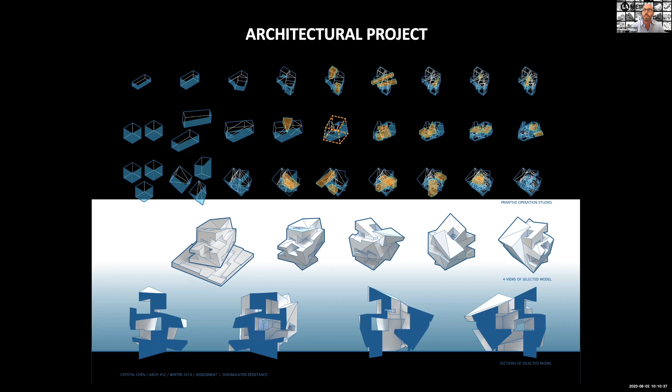To give them some formal ideas or formal interests that have sectional qualities and spatial qualities, usually surrounding geometries that then get embedded in a site. So it's a setup to give them, I guess, an inspiration and architectural interest that they can work on the whole 2 quarters. Our program this year is a multi-income housing and hotel project. It has a bunch of social and health services as well embedded in it, creative office spaces, and retail. So it's quite a large project.

It has a lot of public exterior and interior spaces. We generally fill about 50% of the block, and I'll explain that as well.

We've been reading a little bit about spaces in between. The general program, the housing is about 250,000 square feet, which I know is quite large.

Micro unit housing, about 25,000. Transient hotels, about 20,000. Boutique hotel, 30,000. As I said, it's a multi-income, multi-social type environment. There's high to mid-income housing, mid to low-income housing, and transitional family housing as well. Family services are also built into the project.

There's a large commercial and public space, about 400,000 plus square feet. There's public restaurants, cafes, cafeterias, retails, and flexible creative office space as well. Exhibition gallery spaces and a lot of public land space, about 50,000. So overall, there's about 660,000 square feet.

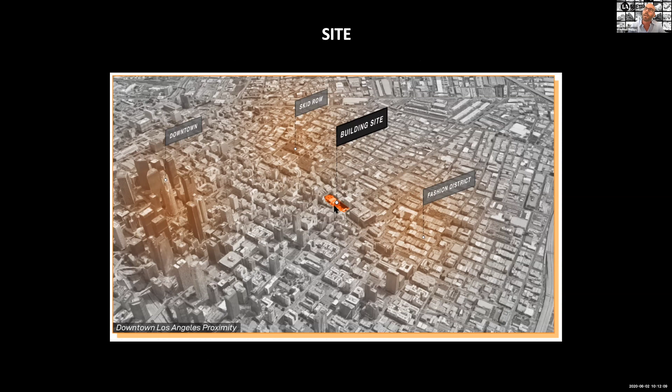Our lot here in Los Angeles - here's downtown, here's the fashion district, here's Skid Row. We're on this interesting moment on Main Street where the grid comes together, on this block between 8th and 9th Street. It's a fairly empty lot, mostly a parking lot.

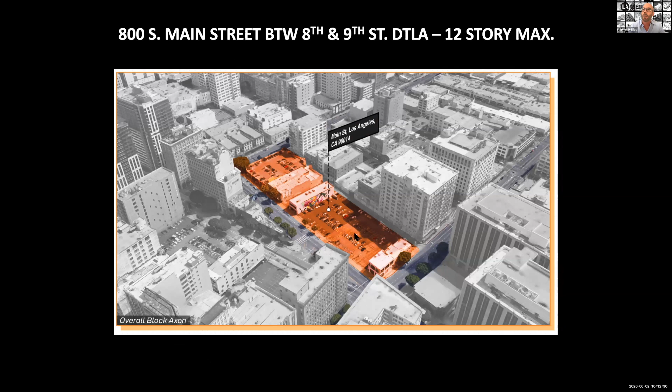We've taken the entire lot, which is basically about 625 feet by 175 feet, so it's a 110,000 square foot print. We're allowed to go 12 stories high, so they're going to end up with a 660,000 square foot building.

So you're generally looking at about a 50% porosity that's guaranteed in the system. There's going to be a lot of open spaces, and we're starting to think about it urbanistically.

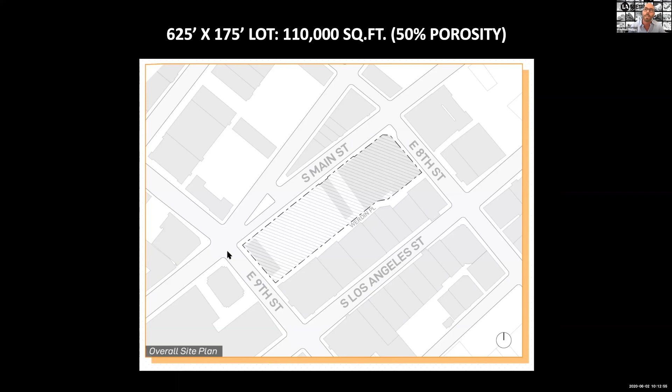Generally we break down into three clear strategies, looking at spaces in between. There's an architectural concept, form and material. There'll be an urban concept. They'll have a clear site strategy. And then an organizational programmatic concept that comes up mostly in section and plan, which can become socio-political as they choose based on where they put things.

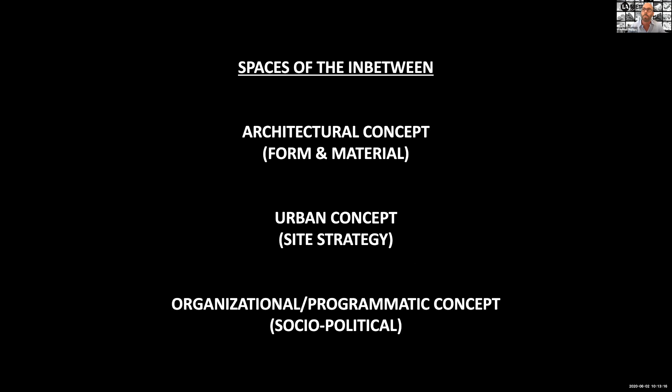So that is me, that's all I'm going to say, and I'm going to stop sharing my screen.

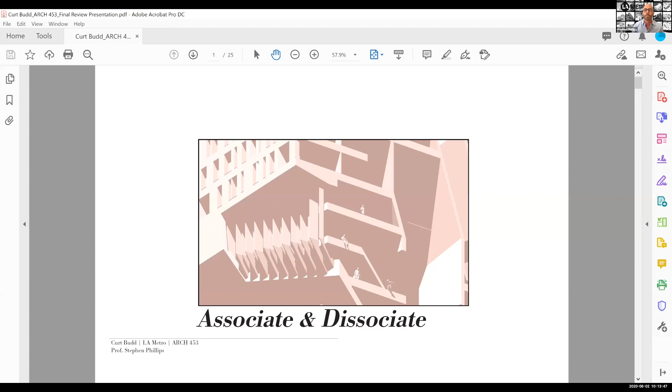This is my project, which I've called Associate and Dissociate. Really quickly, I'll introduce some of the design concepts. Looks like Stephen really took care of a lot of the site information, so I'll walk through the project and wrap up with some details and material articulation.

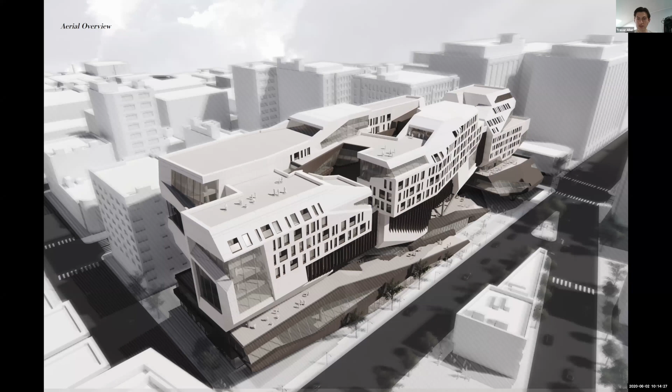Before digging into it, I just wanted to show an overall image of the project. I haven't presented in this format before, so I thought it might be helpful to have something you guys can keep in the back of your minds. As Stephen said, very programmatically diverse, a lot to fit into this site in LA.

Kind of the things that I took away is that it's very oblong and it needs to be very porous. So my site strategies have been to divide the volume into a lower 1/3 and an upper 2/3, with the lower 1/3 becoming the public space of the building, while the upper 2/3 houses the housing units and some of the office space, spaces that I wanted to keep more private.

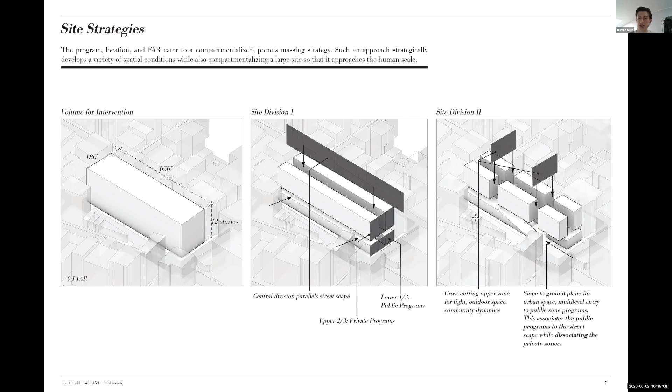I also started to look at how cutting across the site, I can generate some porosity for circulation, light, community spaces, and then sloping down into the site to create a strong connection to the streetscape.

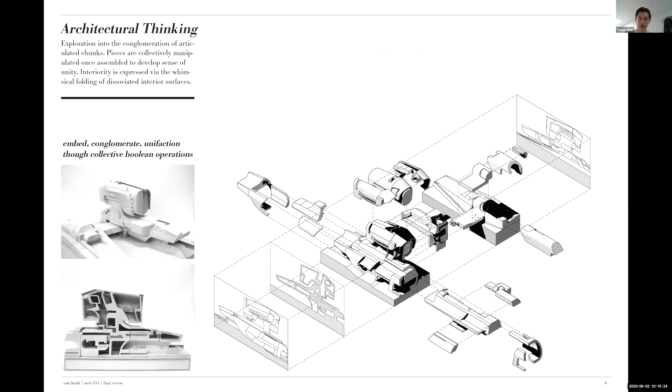Prior to the site thinking, we did some brief architectural explorations. Mine dealt primarily with conglomeration and these discrete parts and how they're coming together and maybe referencing each other. So when I look at the site with the site concepts and my tectonic ideas adapting to each other, I really wanted to explore how conglomeration, embedding, and slicing can form strategic associations and dissociations from one program to another, and from the programs to the site.

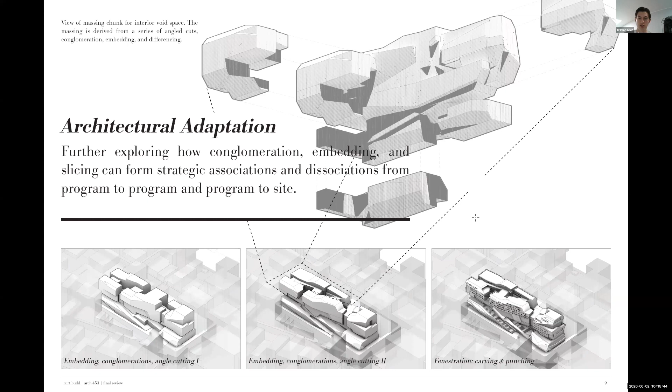These two diagrams catalog the final massing strategy of the program. I'm trying to show how that bottom third really does become a folding up of the streetscape and offer these pauses and terraced moments, which have entries to programs, and it elevates some of the entry points, not just on the streetscape. Meanwhile, that upper two-thirds that houses the office and housing space really becomes detached and more privatized.

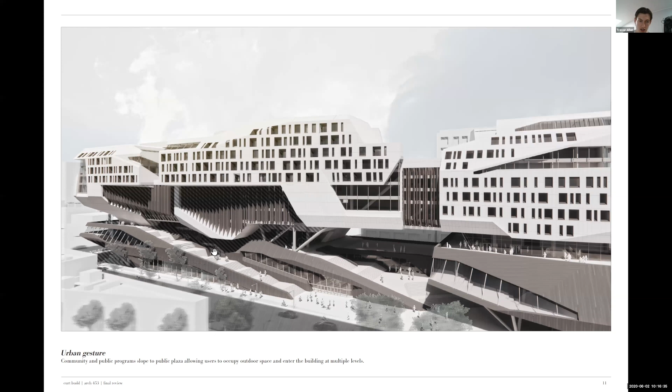This image is just intended to reinforce the idea of that urban gesture and how this street starts to fold up into these staircases, and there's some little terraces in here that form entries into these public programs.

Starting the walkthrough with that public program in the first three levels of the building. Again, the one thing I want to drive home is that these stairs emerging on the left side, but also this central void that begins to develop in the middle of the building, and it starts to mirror the street and provide sort of an internal street front.

There are retail spaces on the inside here, and then moving up to the 2nd floor, this area right here, which you can kind of see in these diagrams, becomes this public amenity and community resource center with some educational spaces. This really has the strongest connection to the street and the most immediate opportunities for entry into the building.

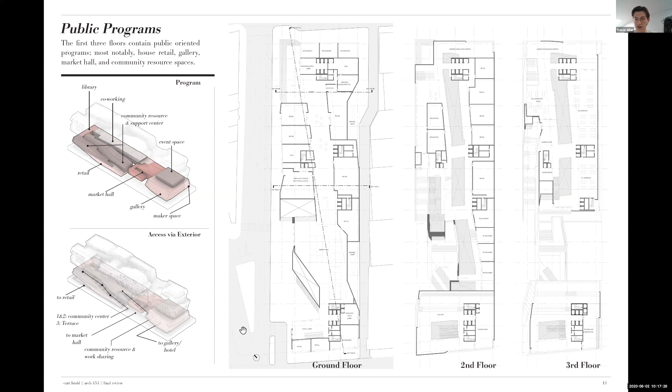Moving away from the public-oriented programs a little bit, on this right side is where we have the boutique and transient hotel, and that sits above a gallery space. Then these little chunks which are getting cut through are community spaces which start to connect these two housing wings.

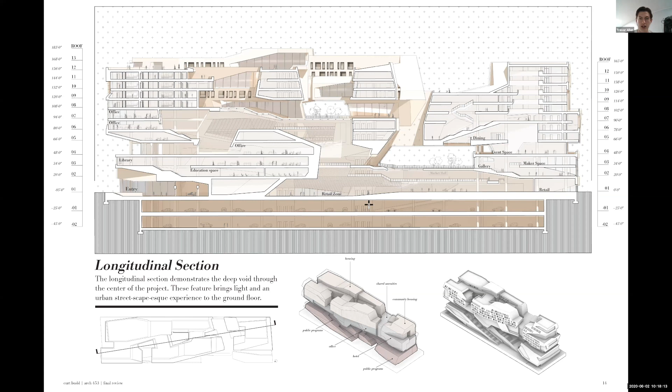And then the office space is the first kind of program to fully occupy this sort of floating or removed two-thirds piece of the project.

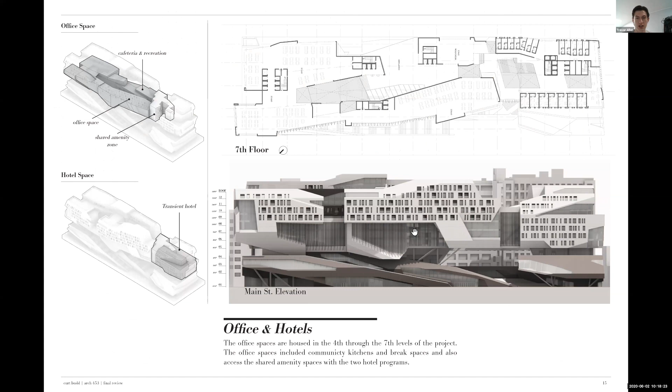And the housing sits at the very highest level. The need for this was, one, to bring light as much as possible into the housing. So being on top of the building, I thought it had the greatest opportunities for sort of porous geometries.

Looking at the section here, I've tried to organize some programmatic thoughts in a more vertical manner. At the top are the two housing zones, again that community bridge space. Then at level 7 right here is a large courtyard, which is accessible for the office workers and for residents of the housing, so it becomes a public space, but only within the building.

Moving down, this central void runs all the way through the project and is intended to bring light all the way down to this ground level, where I'm trying to reestablish some semblance of street frontage with interior retail spaces.

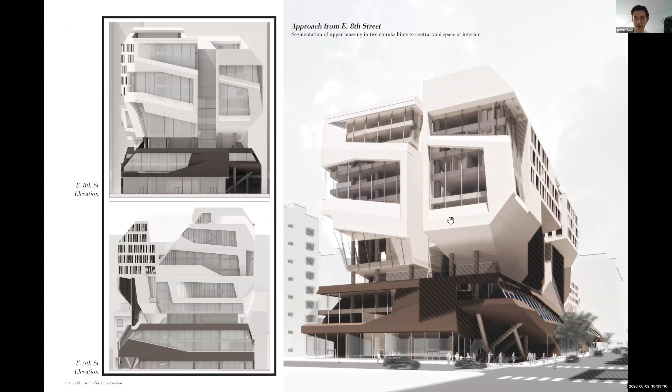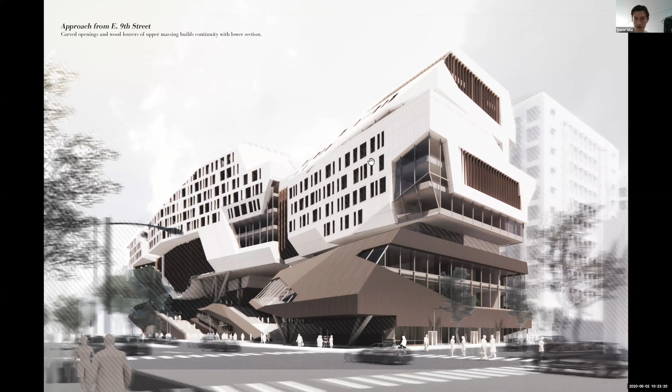Closing out with a couple more images intended to drive home some of the concepts and the differentiation between the massing of the upper two-thirds and the lower third. This is a street corner down here, and the opposite street corner shows a boutique hotel space right here and a gallery space in this area. You can visualize how those stairs bleed into the streetscape.

So that concludes the slideshow presentation. From what I understand, Stephen, we have a couple of options—we can stay here and flip through the slideshow or move over to the concept board. I would let the critics decide, they might look at the concept board, or tell you to go back a slide or two. They have a few minutes, yeah, let them run it. It's nice to be able to see something on your board too, shared.

One quick question—I'm trying to understand the difference between the idea that this thing was one large mass in which you carved out areas inside of it, versus the idea that it's two forms placed next to each other. So when you do that space in here, is it associated with single loaded corridors along it? I guess I probably need the plan. In other words, when you wrap it, do you see this space as uniquely different, or is it the residue of two forms on either side of it?

I'm trying to squint at the last dotted line you drew. Can you say that one more time? Yeah, I'm just trying to understand a bit more the agency of the void in here. Is it the residue of the fact you have two figures on either side of it, or is it something designed intentionally as a kind of separation between things? Is it a space unto itself? Do you wrap the same facade on the inside as you do on the outside? I'm just trying to get a better understanding of how you're thinking about that central space, because it seems to be a key component to the entire strategy.

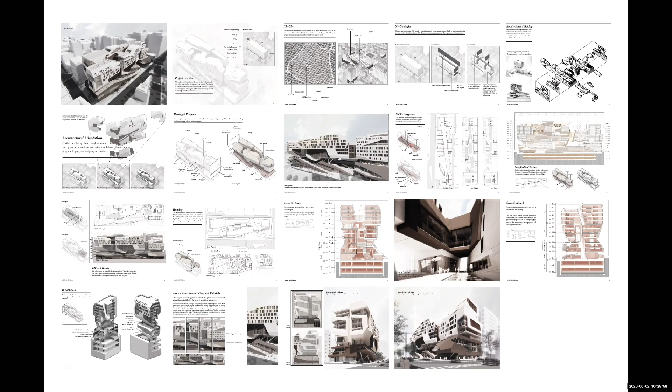Right, so it definitely started as this interstitial leftover space between the placing of two objects side by side. From there, I've tried to collectively slice those objects and erase the initial seam, if you will. I'm starting to wrap that interior facade with the same language I'm using on the exterior. These angled cuts, which create this window within the building, are the same geometries I've been working with to slice the exterior walls. Is this the plan you wanted to see?

It's the curse of Zoom—it's a pretty big building, complicated, a lot of things going on here, really well developed. I keep thinking if I get myself closer to the screen I can read it better. But no, I'm just trying to go between the idea that this thing's very figural objects to something that now has this articulation of specific use, and how did those different strategies start to mesh, and for me it's kind of—when you start doing a void inside, is it a residue of some other ambition, or is it self?

I think the key to this project is that at the base, when you're down on the retail level, you're in some amazing space. Is it sufficiently intentional, or is it the result of trying to take a footprint that's too wide to occupy and plan, so you're having to stick a void in the middle of it? Obviously you want the former.

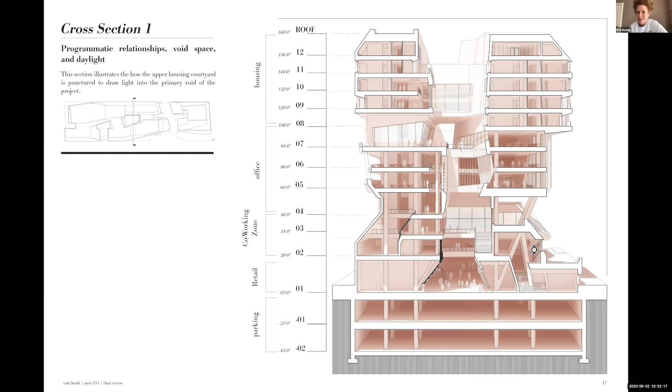It seems like there's a desire in the project to minimize the amount of difference across the living units, to try to have some kind of cookie cutter thing. And of course, for various reasons—economics, scales of time, production, construction—maybe that's something to work with.

But thinking about the conversation on solid and void, you can begin to think about those as operating on different scales to produce more difference across things on the interior, so the corridor isn't always the thing making up the difference between the standard unit and the architectural expression of the form.

I'd like to see more architecture on the interior—more design of the interior, whatever that means. Right now it seems like the corridors are doing the work to buffer out all the difference and all the work you're producing through the big formal moves of the exterior.

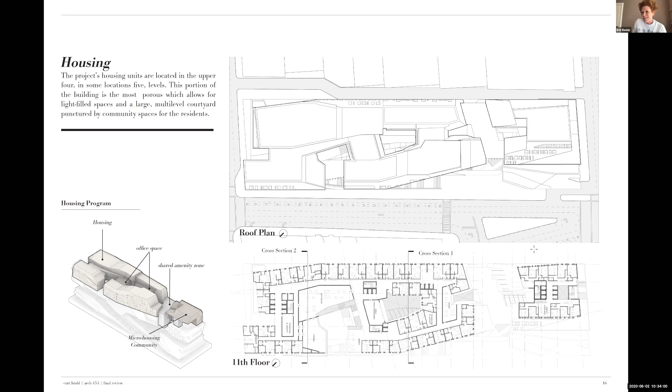Similarly, in a conversation about difference, I'd wonder how much you actually want between the living housing area and the louvered office space area. It seems coded in a way to produce a reading of not just 2 or 3 buildings on the site, but when you look at it, you can read it as even 6 or 7 or more.

I think the project really revolves around a calibration of how you deal with using the sophistication of solid and void, or producing void chunks, to control and calibrate the registration of difference across the site—whether it's the big moves on the exterior or smaller scale moves on the interior as you get into the living units and the office or commercial spaces.

So if I understand correctly, you're saying the exterior seems like maybe 6 or 7 different buildings coming together, and the interior isn't reflecting that and seems more homogenized. There's a desire to articulate different things on the exterior in different ways, but the interior, for all the work and investment put into it, the plans become quite normative.

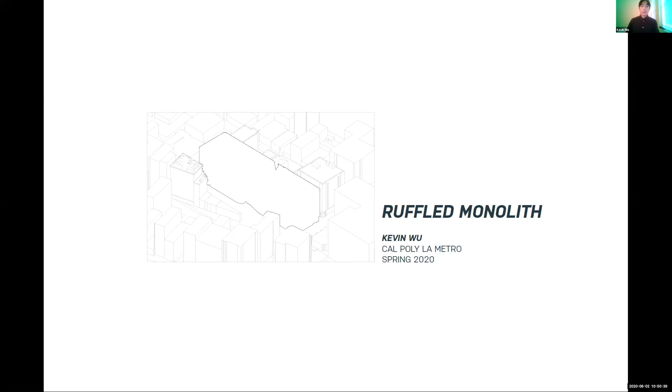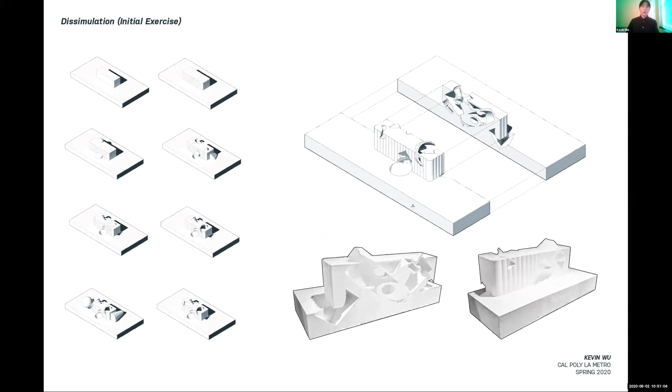I was interested in the carving of spaces using rectilinear and spherical primitives to manipulate the generic box. At the same time, I noticed this monolithic quality of the object and questioned its form, nature, and texture as well. In this case, the ruffled pattern, and how this could influence the perception of the monolith in any way.

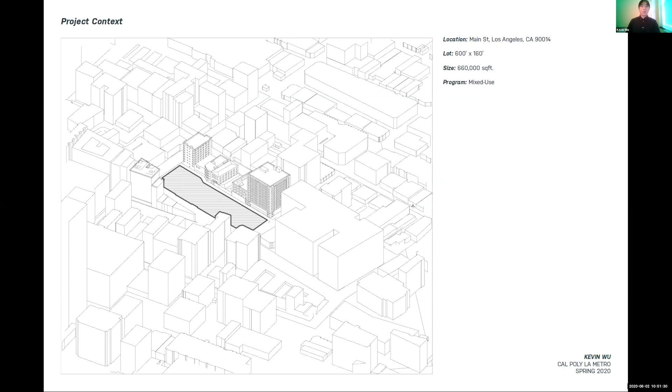So the project sits on a 600 by 160 feet lot on the edge of the Fashion District in Los Angeles, and consists of 660,000 square feet of mixed-use program, which includes housing, hotel, retail, office, and public space.

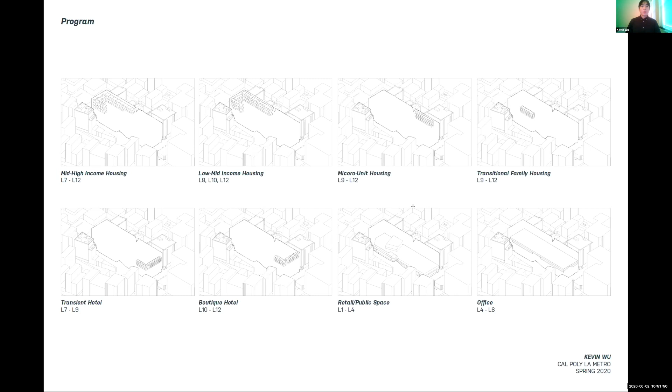Here you can see a variety of programs distributed along the 12 stories. The retail and public space are easily accessible from the ground floor. The housing and the hotel occupy the perimeter of the upper floors, which is connected by two main atriums, and the office space sits in between. Here's sort of an overview look of how it all comes together.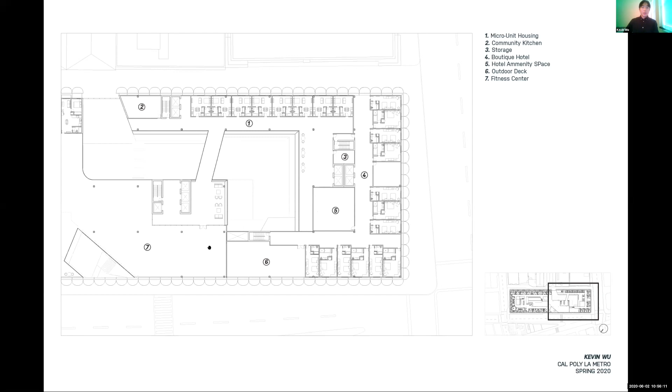On the right, you have the micro-unit housing with its separate chunk, as well as the boutique hotel, separate chunk. The way to bring people together is through these elevated walkways across these atriums into a shared communal space. In this case, on the 11th floor, it's a fitness center.

So going back to this idea of the monolith, I was interested in exploring how levels of transparency and this repetitive ruffling pattern of the building envelope may affect how we read this mass. In this aerial view, for example, the perforated ruffle could reveal the fragments left behind and unite this to become this coherent mass. But at the same time, I wondered whether this kind of ruffling pattern could heighten this monolithic quality.

Here you can see sort of these figures cut by these primitives that begin to shape this facade and this perforated screen, casting these shadows along the street.

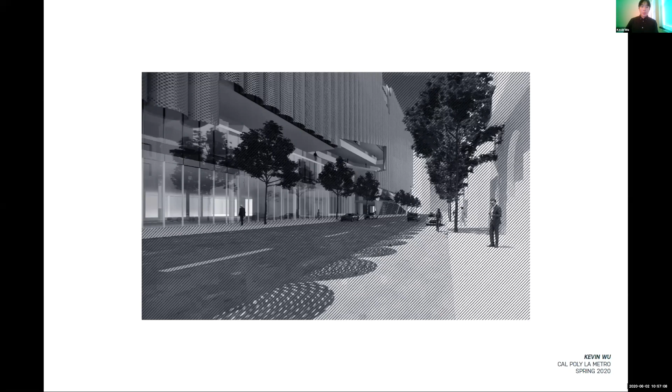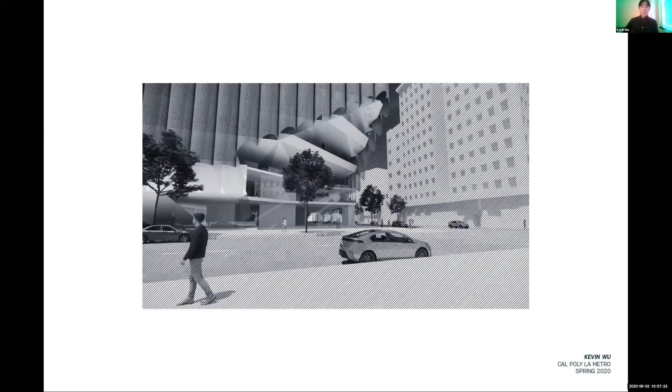And lastly, this is a cut along the corner to really lift this entrance and draw the users in, but also define a boundary of the groundscape leading up to the entrance. And thank you very much.

Kevin, you got me on board right away when you said a ruffled monolith. I had no idea what that meant, but I think that's a really interesting start point. A bunch of things came to mind surrounding that, some questions and some thoughts about what that might mean. But I was wondering, for example, what you were thinking about when you started looking at that subject.

For example, I started thinking about the Friedrichstrasse Tower that Mies did, the sort of angular, faceted building that has so much reflection, so much kind of animation in its skin that one could imagine it as a kind of a ruffled monolith. I also thought, I don't know if you've ever watched Snoopy cartoons, but there's a character called Pigpen, and he has these kind of lines around his head all the time. That's because he stinks, he smells, and those are kind of radiant, ruffling, stinky lines coming out of his head.

But I was struck by, in your project, I was trying to figure out what's a ruffled monolith? What happens at the perimeter of architecture that allows that notion of a kind of monolith to somehow be of value to you? It seems to me it would open up ways in which one obtains access to a form, the way one walks through a facade, the way an inside is related to an outside, the way a program might be grasped by an envelope. All kinds of things come forward there.

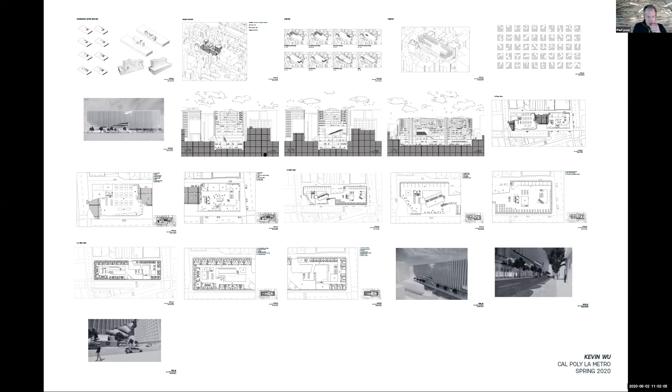Yeah, I'm struck by the effectiveness at which you're able to take a kind of binary and use it to activate a lot of the projects. So if you zoom in on your section, I mean that ruffled monolith is basically a kind of contradiction, right? That's the idea of the ephemeral and the massive, and the striated and the blocky.

And I think your section, particularly your long section, makes clear that what you're setting up is this stacking of floor plates, and you have oddly high parking, oddly low housing, but that's another issue. You've got this stacking of floor plates, and then it's clearly different and identifiable where you've cut these voids, right? I think the next step would be to go beyond simply the registration of difference, but to actually ask what are the consequences you get out of these things.

So when you move to your plan, part of what I'm interested in is where do these two come together, and what are the places? If you go to your upper plan, my worry is particularly at the housing level, where you get the single loaded corridor, and then it opens up to an atrium and you just get a void. Is this enough of a payoff, right?

So if you're going to play this difference, which I think works as a kind of diagram scale, does it play out in the specifics? If this is housing, would you really want a big atrium, which is basically a kind of visual mechanism to release from the density? Is that enough of a payoff, or would you want something else in here?

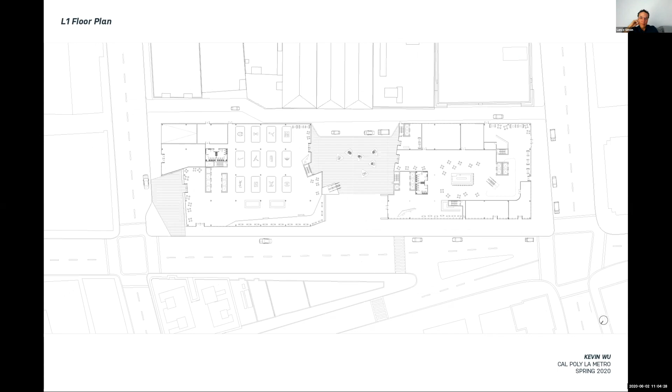Can we go back to the long section, and then I want to flip back to this plan? I think there's something here. You started us off with an intriguing title, and your exploration is interesting because you set your own boundaries around it. But I look at the section and the plan, and I worry about this thing that happens quite often when you have a very tall building that you try to carve out.

I'm not sure that you're getting the light and space creation that you think you are. I could be totally wrong, but sometimes when you go back to the old way of doing architecture, where you literally put layers of plans on each other, you suddenly realize, oh my God, I cut off the light that I thought I had on level 2, on level 7, because I projected this thing out. So that bothers me.

Housing has very different needs than hotels, and you'll hear me talk about this a lot. I love form making. I worked for firms that did big forms, holes in buildings, and things like that. But the real success, ultimately, in architecture is we're making buildings for people, and if your exploration isn't also about placemaking, about experience making, then we're more sculptors than architects. We could get into the debate of Frank Gehry versus Gaudi versus Michael Maltzan or something like that. There's great photo ops, and there's great places to be, and sometimes there's both, and that's the real successful project.

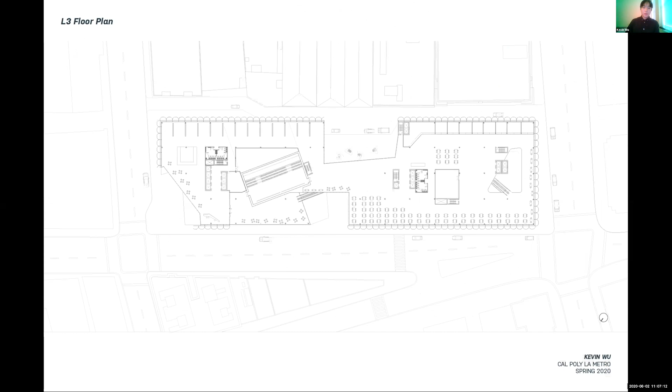So I only have one more comment question to put out there. When I saw the plan, let's go back to that one. And then there was one other one, I think the one that has all the logos on it.

I thought immediately of new airport design, which is fascinating because nobody stays at an airport for longer than hopefully a day, right? But it's become very important in airports to make places, a set of experiences, to live a full day while you're there. That's something I think you're onto and should keep exploring, because it's a transformative way of approaching architecture—how do you make a place that have impact really quickly?

And then what if it also needs to be experientially durable? Nice work, though. Thank you.

Hey Lance, I'm not sure if this was the way you were framing the comment about plans on top of plans, or program types on top of program types, but that strikes me as another really interesting opportunity to figure out how this plan is ruffled.

The lowest hanging fruit to diagram that is probably the parking garage. Everybody's familiar with the parking garage having a kind of structural problem that's very different from the housing above it, or the office space above it—those two demands often produce a kind of disconnect in the section in some way.

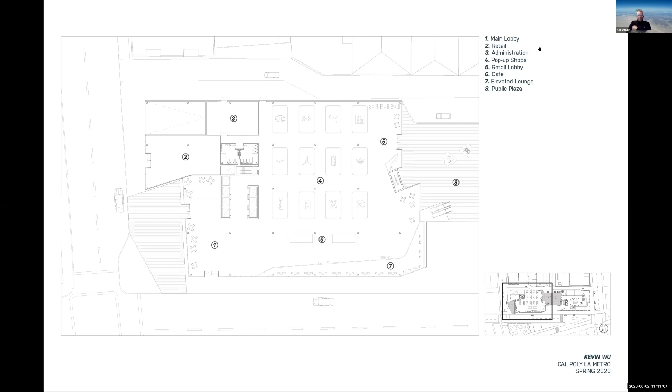So the question of the width of the building in plan is dictated by the site. If the building were half as wide as the site, it wouldn't have the internal volume to impregnate all the air into it, so you make it the same size as the site. And one starts to think, like the old adage that work fills the time—well, here's where bubbles and voids fill the space, right?

And in some ways, it's an imprisoning problem. You have to continue to deploy bubbles of space, right? And while we're doing that, we think that, of course, they're more interesting than the backfill of the housing. And the backfill of the housing is an offset layer to the big facade project.

So on the one hand, except for a theater, the rest of the voids take on their identity just simply based on their shape as opposed to their program. It's not a forest or a zoo or a planetarium, odd things that somebody like Tschumi would throw in to create programmatic difference.

In other words, it's the sublime nature of designing the space, as a brilliant thing that gives it purpose, which in some ways in the hands of certain architects works on its own, Alvaro Siza or somebody like that, and in other architects it becomes an albatross to have to just continue designing that in there.

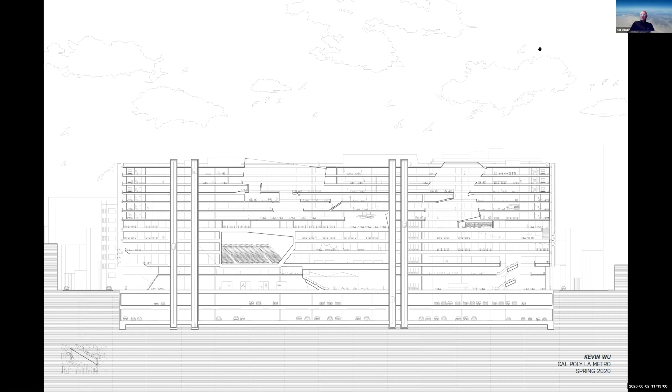So in a way, your project presents the limits of that, or the vicissitudes and problems of that kind of issue. And I can see when you look at the plan, the offsets are about trying to get to the point where the project looks like it's populated with nothing. Am I right? You're saying the retail?

No, all the voids that you carved into the project. Yeah. You know, from the very beginning, you knew that you needed a figural device that was going to allow the project to get filled up in reverse. All the issues of the...

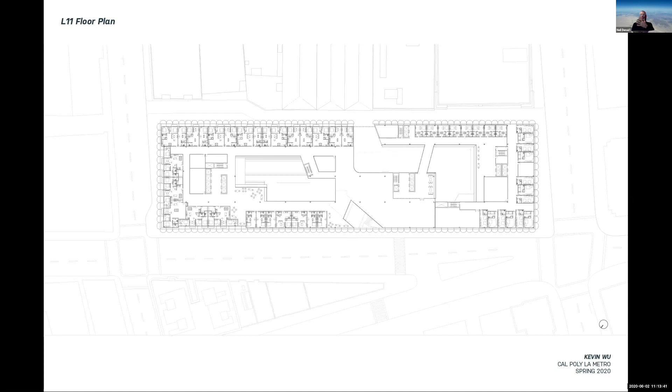qualities of the building, which are completely opposite to the previous project, that you'd use repetition, in this case, a fine grain exotic repetition of these serrated or ruffled skin to create the interest. You can't have interest unless you've got a certain level of wallpaper background, right, to read it.

But I think the exterior works really well at that level. I mean, I wish that on the interior, maybe the voids were more banal or filled with trees only, or inaccessible, or let's say a conceptual overlay to them in terms of what they would do to affect life within the building, even though they could still be deployed the way in which you're talking about. So it's like writing a text or a program for the nothing, for the void, and giving it different kinds of purposes. That might be something to think about.

Yeah. That made me think, Neil's comments made me wonder just how much, well, just about the approach in general, whether the voids are actually, if they can be conceived as voids, or maybe another way to think about it would be, and approach the problem would be like, how much of the building do you really need to enclose, and how much do you not, as opposed to the kind of, I know you conceived of the project as a monolith.

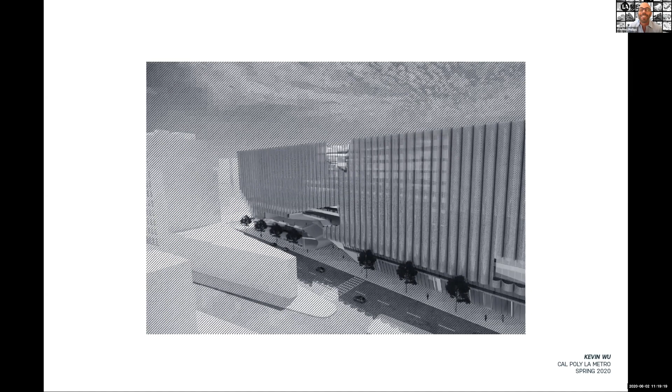Okay, thank you everybody for all your comments. Kevin, you really did do a great job pulling this together. Thank you, and I think the comments are right on, so I'm not going to say too much more. But you had a great first initial start. I'm happy the ruffles became your theory, so that was great. Okay, thank you everybody, let's move on.

As I was saying before, my project, Pan Theater, is comprised of interlocking and interlaced blocks that are stitched and sutured together through different carvings and scores that I've made in the mass.

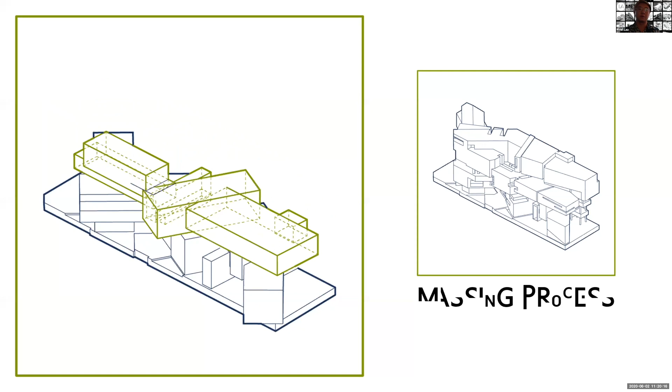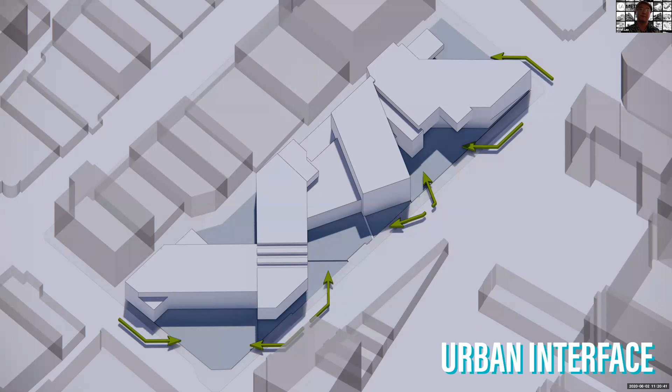This was an attempt to create more public eddies through the flow of downtown LA, areas that people can come stop in for a little while and draw them into the building, which is why I've chosen to include my retail primarily on the bottom floor of the building, with a few other places throughout.

One thing that was particularly challenging with a project like this, especially with residential and having a mix of private and public areas, was making sure that the residences had the privacy they needed, as well as access to all of the facilities and amenities of the building.

So my various housing typologies, the more permanent ones, are all located in the top few floors of the building, with the boutique hotel and transient hotel in the middle above the existing retail.

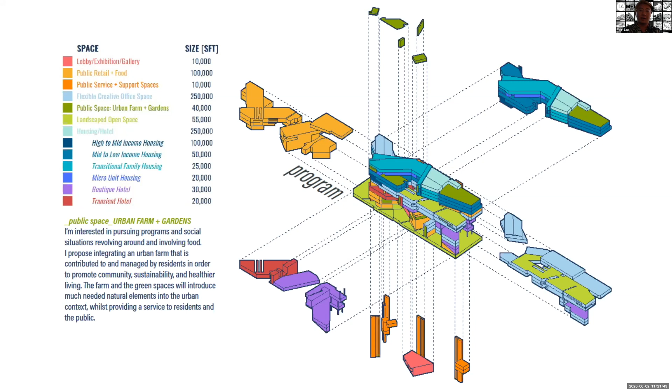One of the spaces included in the program was this idea of a combined exhibition and lobby space, which I thought was a really good opportunity for people who are just beginning to learn, or first-time visitors to the project, to experience and learn more about the building as they enter and move through it.

One of the things I was really interested in is when looking upwards, as so many buildings draw your attention upwards, I wanted to play with the idea of having a singular mass or homogeneous ceiling above you. So I wanted to have all of these masses layered on top of each other, creating almost like a layered city, to make it more interesting and breathe more life into these atrium and courtyard areas.

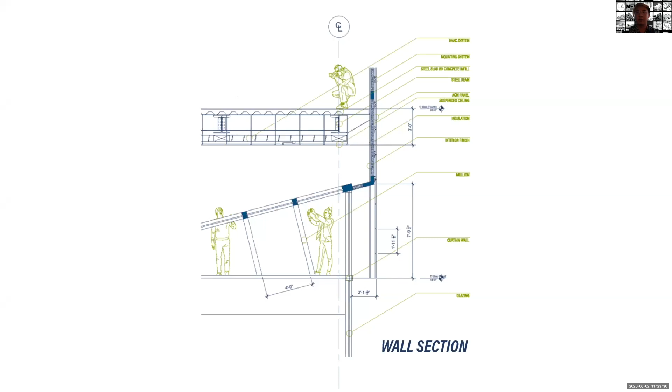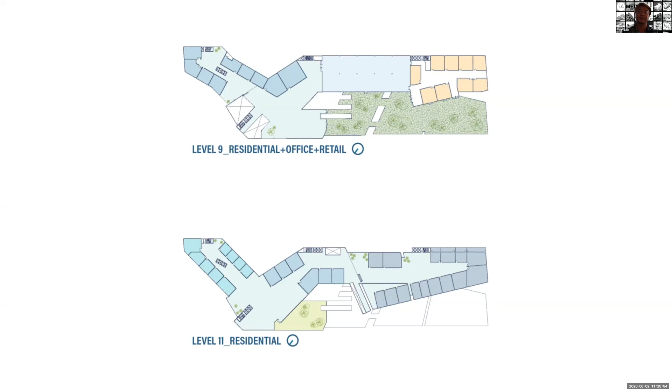As we range from high to low to transitional family housing. Finally, I have some elevation studies I wanted to share. One challenge with having these different masses was that each module could read as an individual but also together as a whole. So I was experimenting with different kinds of screens, translucency, mass, and screen areas. Thank you.

One of the things I find really interesting, and I think it shows up in this image well, is that a lot of your effort has been trying to break down the scale of this mass. It's a big building and you're articulating it. Actually, one of my favorite drawings is your program diagram showing all the different program types—it was the most complicated program diagram we've seen today, like a cacophony of colors, all these things mixing together. There's nothing to apologize for. I think it speaks to the ambition of the project, taking this super large project and finding a way to break it down into parts that become a kind of legible architecture.

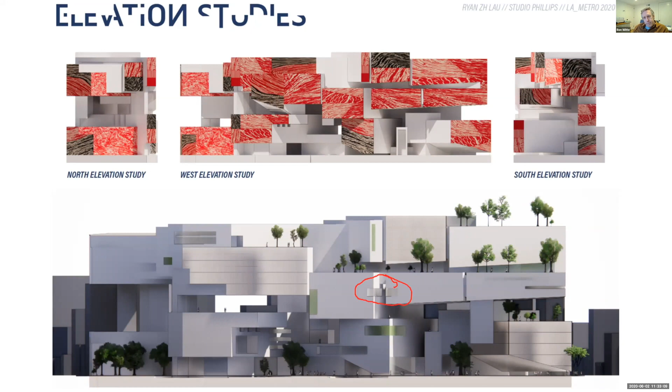Like, for example, right here, there's a slot that jumps from one block to another block. That's a Nakashima woodworking technique, where you put the kind of butterfly shaped wood between two sides of a crack to somehow hold it together. And that's a kind of a moment in which two pieces are somehow brought together.

And one could imagine, for example, this corner and this corner and this corner are similar in their kind of alignment that does that. Of course, there's an optical thing here, which is, this is an elevation. If there's any inward into the paper differentiation, that becomes harder to read. But I'm looking for places where that reassembly is occurring, and I would do more of that.

I think it's quite interesting to think about this sort of willful heterogeneity and willful dissipation of the architectural condition having reached a limit condition. You know, the pile, whether it's a Renaudie pile in France or a Safdie pile in Montreal, maybe the pile is a kind of a spent project at this point. And maybe we should be a little less obsessed with continual breakdown of scale at some point. And maybe that doesn't mean the monolith anymore, but it means thinking in terms of assembly as opposed to disassembly.

That's very interesting. Thank you.

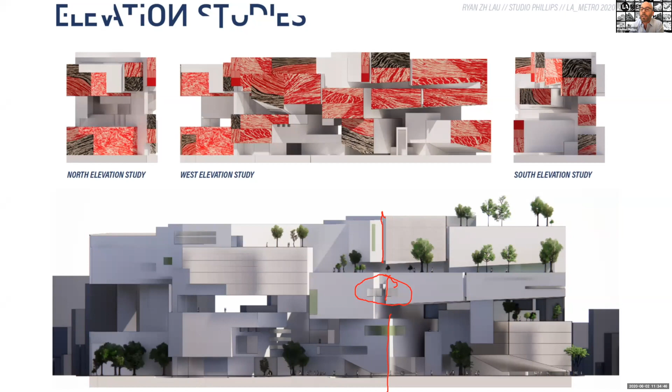Great. Thank you, Ron. We're going to need to move on, but I think, Ryan, I do appreciate that you have a slightly different urbanistic approach versus the other projects we saw today, where you do externalize much of the open space. And I think you think through it in a really good way. So I appreciate the way you've gone through this project and done it.

Yes, as people said, there's work to be done. So I think you know that. And I think you had some great comments. And that last one about how you understand the breakup of these pieces, I think is a really interesting one to keep thinking about. So thank you.

And we're going to move to our last project for the morning. This is Trevor.

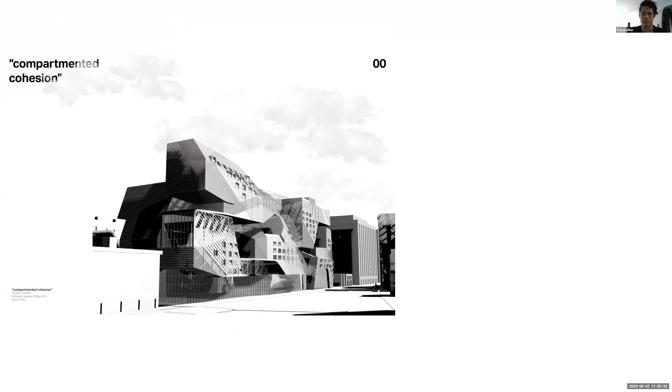My project is called Compartmented Cohesion. I just wanted to start off with a quick rendering to get you guys acclimated to the project. So there's that.

I think we can skip over the site stuff because Stephen kind of went over it.

The project revolves around three main concepts. The first is the dissimulation conceptual framework that we did at the beginning of the studio, which I'll talk about in a couple slides. The next idea was exterior circulation, connecting the street with the building and giving it life through circulation on the exterior. The last thing was allowing that circulation to bleed into the interior, creating a network of paths within the building that give it more life and make it less monolithic.

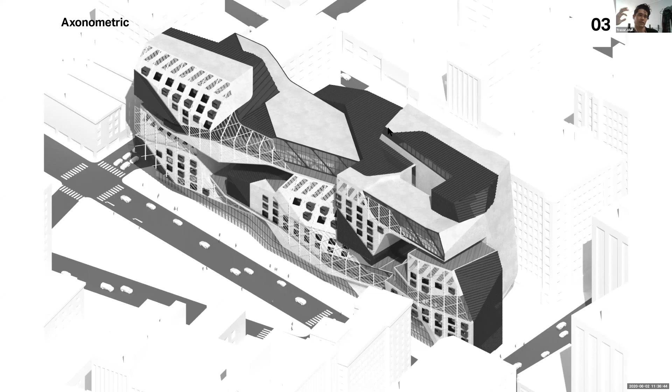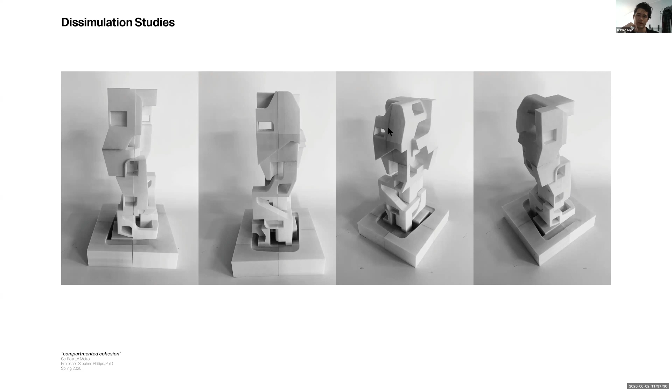Starting with the dissimulation concept, at the time I designed this I was working for Neil, and I was a big fan of his, still am. Some of his moves kind of rubbed off on this exercise. Essentially it was about taking discrete masses that were simply but carefully designed and putting them together so they don't necessarily intersect, they just share faces. When they share faces, it blurs the line between what the mass is as a whole and what the different parts are. Exploring part-to-whole relationships was the whole point of this exercise.

In order to create differentiation within the mass, it was really hard, because when I designed that first study, having the separate discrete masses share faces didn't create a real porous interior. So the third concept, interior circulation, revolves around intervention within the masses themselves. On the exterior you can see that exterior circulation, and it's very different when you move into the interior.

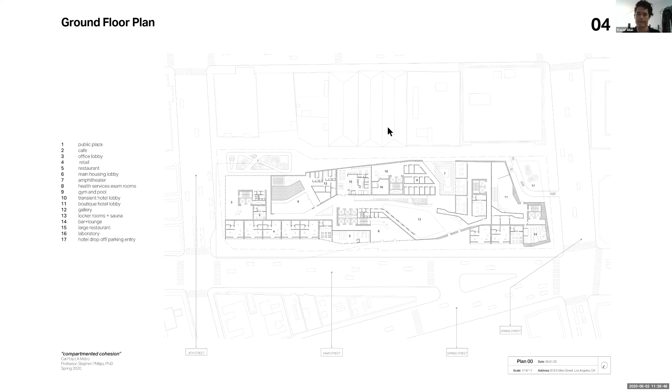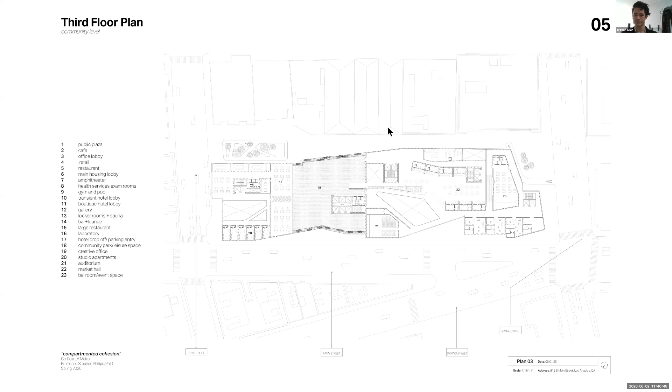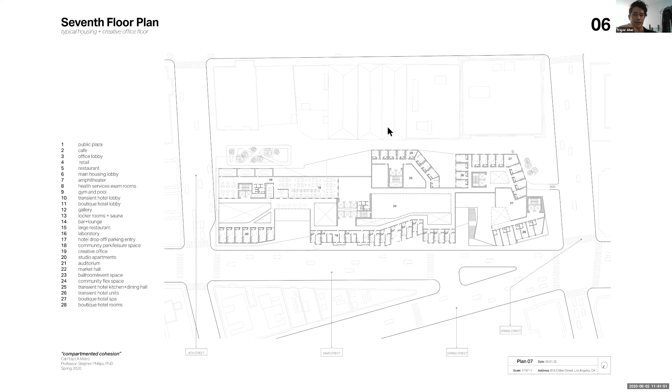The seventh floor plan is your typical housing floor. I was able to compact the hotel down on the bottom right-hand side and give the micro-unit housing and hotel some social spaces to share. In the center of the building, number 24, there's a large community space where people can congregate. There are a number of atriums throughout the floor plan, creating a visual connection between the different floors. These void spaces can even turn into slivers, so there's always a visual connection between floors—even if they compress and pinch, they open up and do interesting things to create an energetic interior space.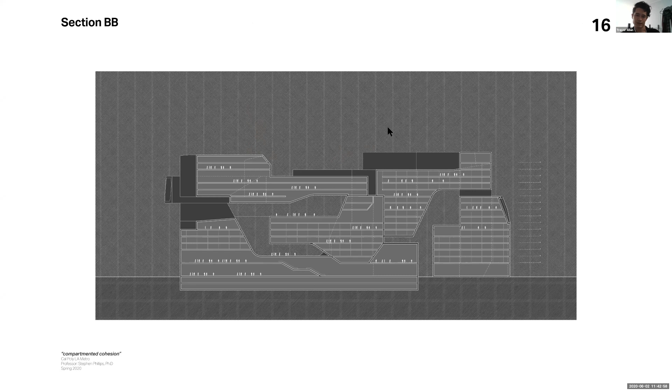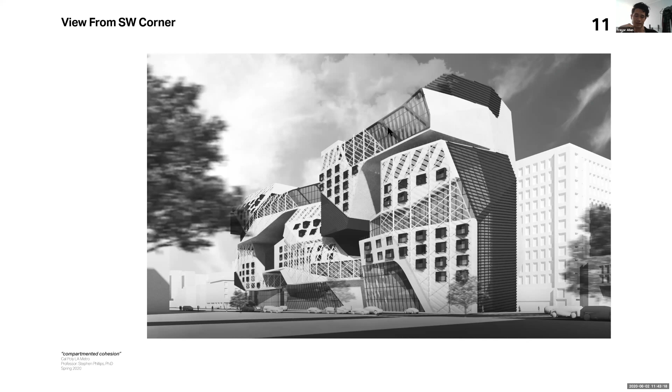Just some quick visualizations looking at how the exterior circulation activates the street and the relationship between the facade and the city, and how the variation of the balconies that pop out of the building give it a cool energy.

Again, from the southwest corner, you can start to see the skin I applied on the exterior of the building, which gives people on the lower floors more privacy, but is also porous enough to allow you to view the exterior circulation on the outside of the building.

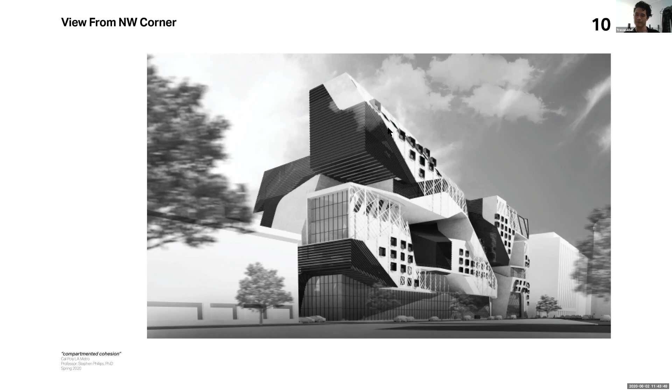My detailed chunk is slightly technical, but it details that open gallery space on the ground floor. The two floors on the bottom are underground parking. You can also see the sculptural staircase in the ground floor, and on the fourth level, the network of paths that emerge out of the interior when you create these slivers of void space in the floor plan.

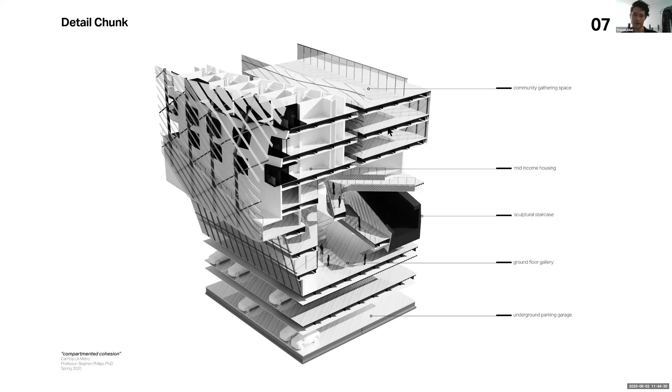Looking at the detailed chunk a little closer up, you can see the plan start to taper and split and do interesting things with the circulation.

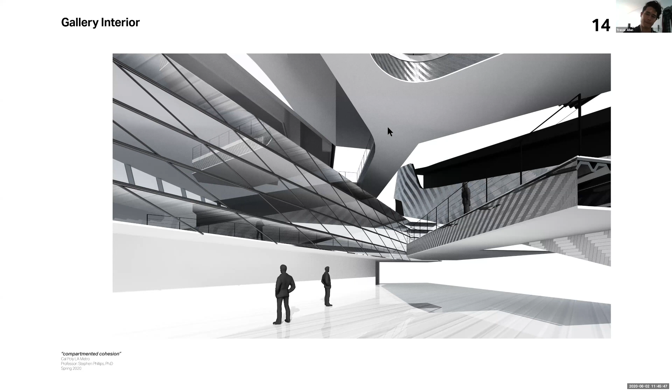Finishing up with an interior shot of that gallery space, looking at textures and how to treat certain surfaces, and how to deal with the edges of floor plates and the void space that exists above them. That's it, thank you for listening.

Trevor, I like listening to you. You're a smart guy. I think you and Neil are good bedfellows in that sense. He's a smart guy too. I think it's interesting that there's a kind of sympathy in the way you're thinking and working, across things you may have seen or developed out of experiences you've had. But most of all, it's interesting listening to you. You're an intelligent guy taking up different frameworks.

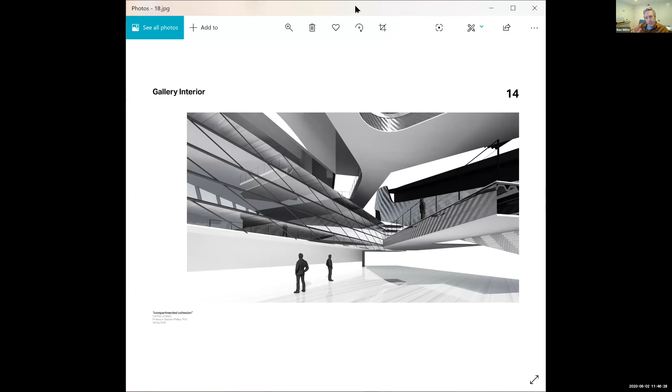Can you go back to the elevation you showed early on? Yeah.

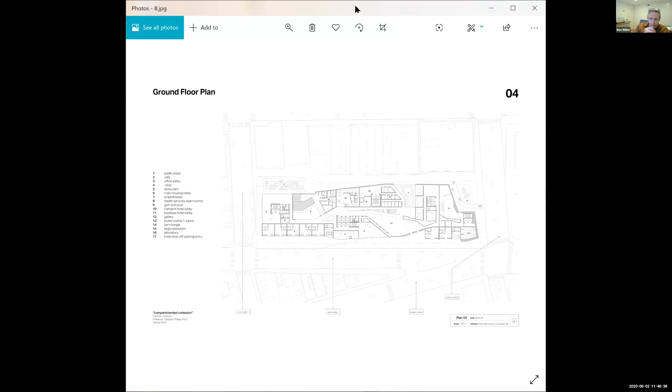Your section actually does that too. The gray drawing with the white lines shows a bit of that similar property. The perspective you show at the end doesn't so much—I don't know to what extent you're trying to do this or not. The interior view at the end is, you know, you're inside a collection of things as opposed to inside a single thing. But I found it very interesting to think about the assembly of all these masses producing that prospect of unification somehow on the inside.

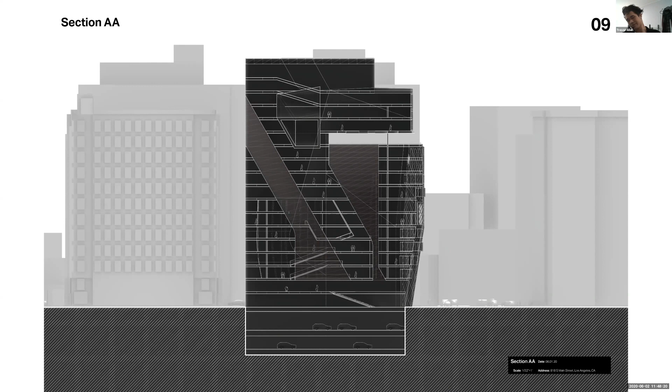Yeah, absolutely. The conglomeration of masses created a pretty monolithic building that I needed to do something about and intervene in some way. So this is what I came up with.

What drives you to do that? I'm trying to pick a fight with you here. What drives you to do that? Sorry, drives me to do what? To need to somehow take a single thing and break it all apart.

Because it's such a big building, and I think you guys discussed this earlier, right? I tried to build something that was relatively monolithic, and it was strange. It didn't work. I want to express that I'm kind of more of an intuitive designer. It's hard for me to explain the design process, but it just didn't feel right.

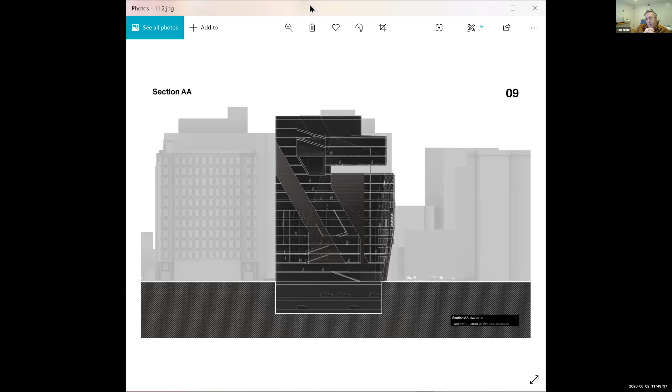I think I wouldn't stop there, Trevor. I think you're a bright guy, you gotta sort of step into that a little bit. So I would probably not have taken the bait that I was trying to lay out for you, but I would have maybe tried to articulate the way in which wholes and parts behave in new ways relative to one another. So we may not reconvene architecture in a way that's entirely singular or monolithic, but I think in these voids inside your building, you're reconvening it in a quite new way. And it nonetheless is a kind of reconvening. It's no longer breaking it all apart again, as I was referring to earlier. I think that's actually quite exciting.

Yeah, I definitely wanted to do something new on the interior, and I started to use that pinching technique that kind of is a language on the exterior with the circulation paths. The interior also sort of has that pinching technique that allows a visual connection between floors. So you see a lot of energy and you see a lot happening, but you might not necessarily be able to get there immediately.

Trevor, on the circulation pathways on the facade — what do those pathways connect and what do they serve, so to speak? I know that they're migrating to the exterior, so they serve the effect of visually connecting an animate aspect to the project, but are they completing circulation loops? Are you getting more exposure to something?

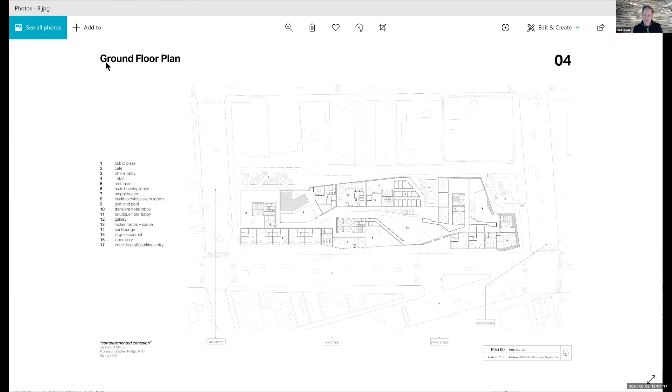For me, the results across the studio are really, really interesting. Plan, section, elevation - they're all different. There's evidence of multiple projects in each individual design proposition put out here. That gives you guys a great font of material to continue developing, whether in the next project or over the summer. I found this really interesting, in part because the project was so difficult to begin with. So congratulations, Stephen - you challenged people in just the right way.

Thanks for having me. Thank you. They're a particularly strong group for sure, despite the environment they've had to work in. I have to say, this is half the size of what we did last year, and it's more successful in many ways, I'd argue too. But thank you, they're a great group. I'm impressed, Stephen - you should be very proud of yourself and your students.

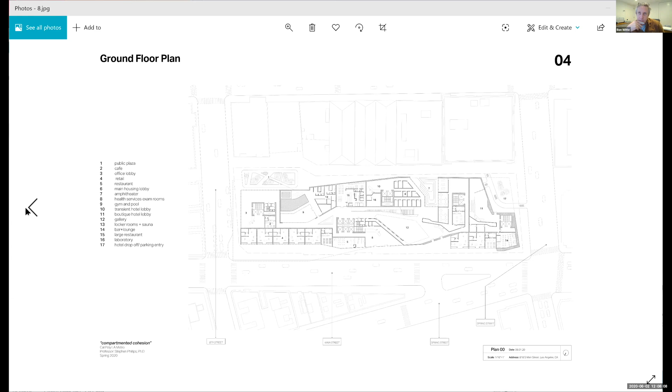I would only echo your comments, Stephen, not just for Trevor but the group as a whole. I think there's something very interesting - I think you're downplaying, Trevor, in a way, the value of design work, and to some extent the value of the subjectivities that come along with that work, as in fact fomenting something intellectual that's important as an outgrowth of that. So it's not so much a missing piece in the sense that it's blank - it's already loaded into what you're doing, and there are ways you can extract that in terms of articulating what Stephen's asking for. But I think that's kind of a lesson for all of us, an ongoing lesson, and I'd encourage you to pursue that.

It's not always easy, and different people are going to approach it from different perspectives. There are those that will start by writing something, and those that will start by drawing something. But at the end of the day, those two are going to somehow engage one another. I think that's actually pretty exciting in this moment. Whatever your next steps are will complement what you're doing now, and you should target exactly how that's going to happen in some form. But I found your projects really interesting - I found the projects all morning, all afternoon now, really interesting to think through and discuss with you. So thanks for presenting them.